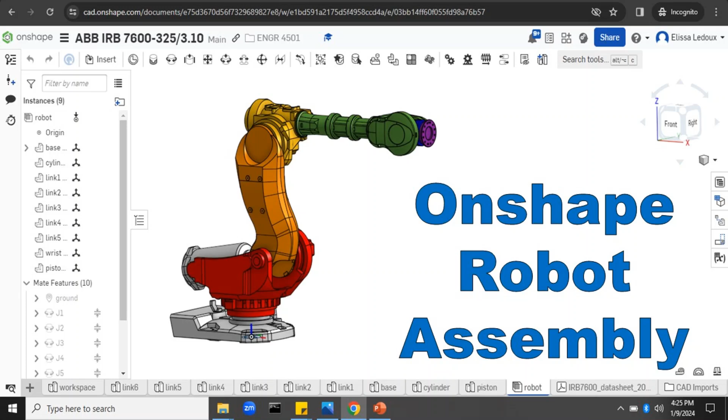This video is going to explain how to load a robot into Onshape and put it together into an assembly file with properly mated joints.

To get started with Onshape, first just go to onshape.com. It brings you to this page, and if you are a student, you can create a student account up here. Click that and create your student account using your school email address. If you need to renew your student plan, you can renew it here if you already have one. Now I already have an account, so I'm going to log in.

Basically, what you want to do is create your first document. You go up here on the top left to create, then document. You can call the document whatever you want - I'll call it a robot. You would want to name it after whatever the robot is that you're going to load in, but for now it's always possible to rename. That's one of the benefits of Onshape - you can rename your files and it still knows what they are, even if you've used them in other documents. So we'll just call that robot for now and create.

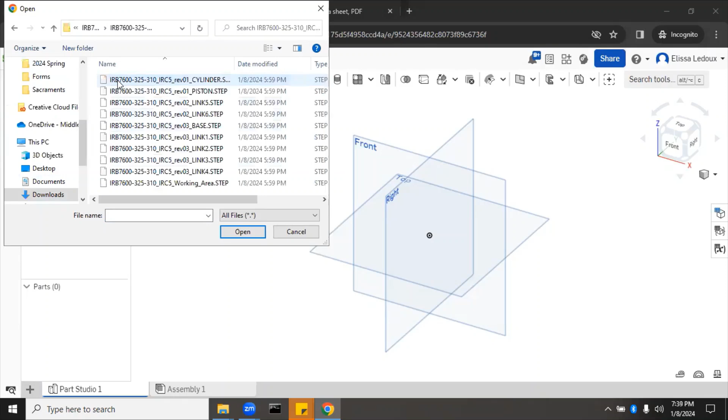So it brings us into here. To import CAD files, you click this plus button and select import. Then navigate to wherever on your desktop or computer you have stored that - normally it would be in downloads. If it's a zip folder, make sure that you unzip the files, go into those unzipped files, and you can just highlight all of them and click open.

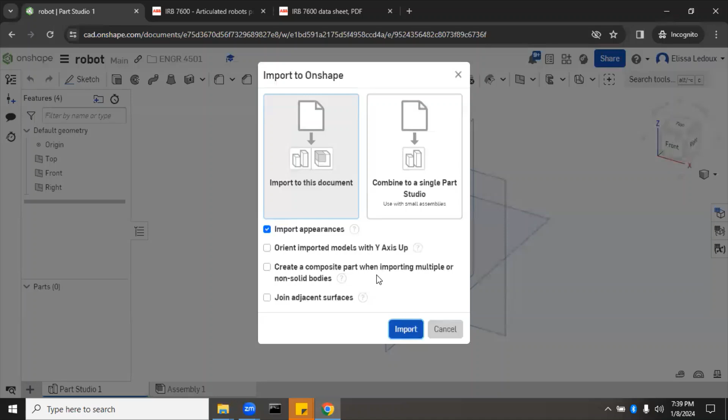Import to this document, import appearances - that's fine. Imported models with y-axis up would be if you are importing a SolidWorks file in particular, and creating a composite part when importing multiple or non-solid bodies would be if you just have surfaces. But in this case for the robot, we don't want to create a composite part of the multiple robot parts, because that would lock it all as one piece and then you wouldn't be able to move it. So we'll just go with import appearances, click import, and it will take a few minutes for everything to upload.

You'll know when everything's uploaded because it will say the name of the part and then 'was translated successfully.' We'll X out of that. And this is the IRB 7600 robot - so this is what the robot looks like.

The particular model that I brought in was the 325 kilogram, 3.1 meter reach, and I used the step file. You can also use a parasolid. This was gone into more detail in the previous video, but just to give an overview, it's that.

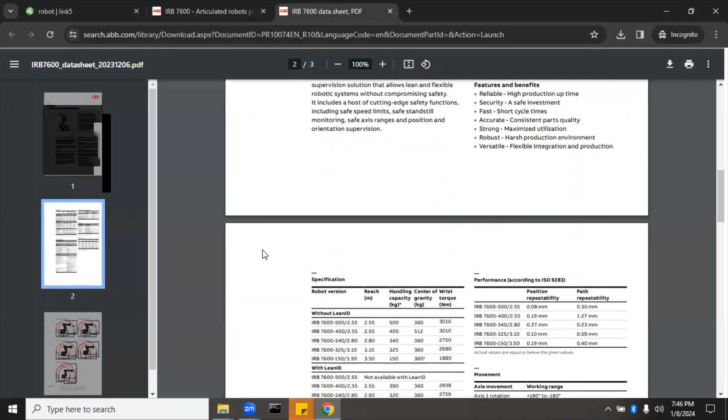You go down to more information, and if you click on the data sheet here, that brings up this file, which tells a little bit more about the robot - the axis ranges, the different models that there could be, max speeds, and other stuff like that. So it's the data sheet for all the 7600 family, and ours is this one here.

So we can rename our robot - that's 7600, 325, 3.10. You can see all the parts showed up here on the bottom.

We'll click on these different ones - working area, and they'll all go here. Then there's a new folder called CAD imports, which just has all the individual actual files, not the translated version. To get out of that, just click the all tabs button again, which brings you back here. So Part Studio 1 has nothing in it - we don't really need that, so we can delete it.

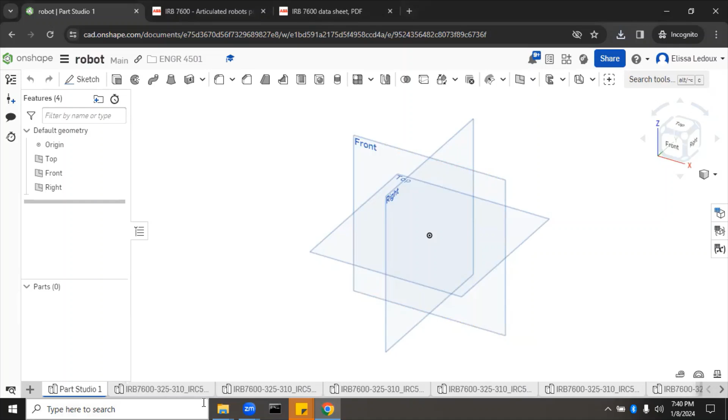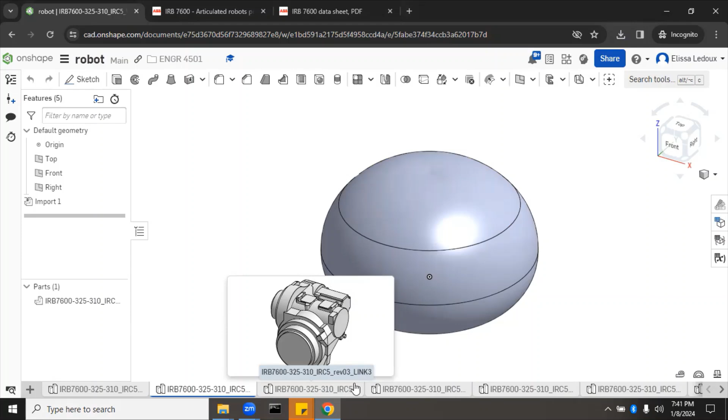This takes us to our next part. One of the things we'd want to do here is go through and actually rename these files, because right now they all look the same. You can see that the whole name doesn't fit, so we'll want to rename that so everything's called what it actually is.

So this is the workspace - this is just an illustration of what the robot can touch. We'll rename that and call it workspace. It's also just sort of like a bubble - say bubble.

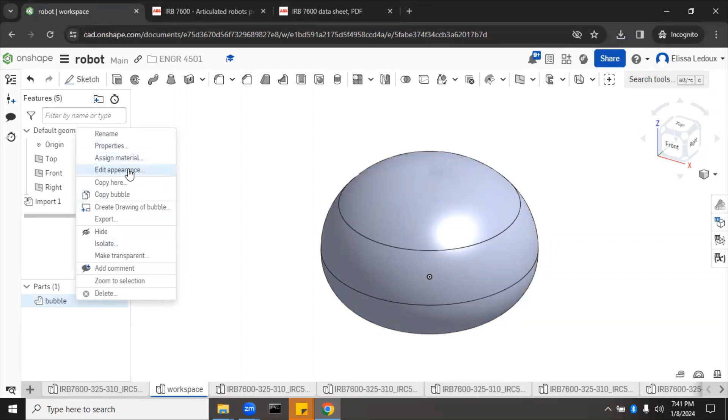Now for this one in particular, we might want to change the color of it. So we'll right click, edit appearance, and we can make it transparent, change part transparency, so this way we can actually see what's inside of it. Let's just put that to 50%.

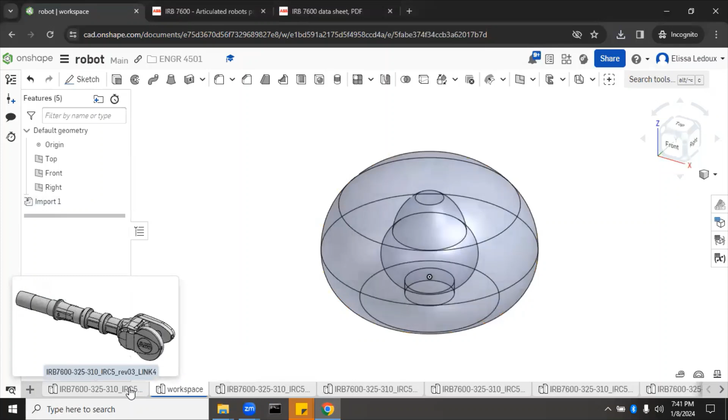Okay, moving on - this one's link 4, so I'll go through and rename all of these. Right click, rename link 4. You'll see in here there are actually 5 different things, and we just want this to be one link. If we go through and click, that is the actual link. This is some little part on the top, this is the ABB logo from the other side, this is another little part, and this is another ABB logo. So this one was the main one, and that's the one we'll rename as link 4.

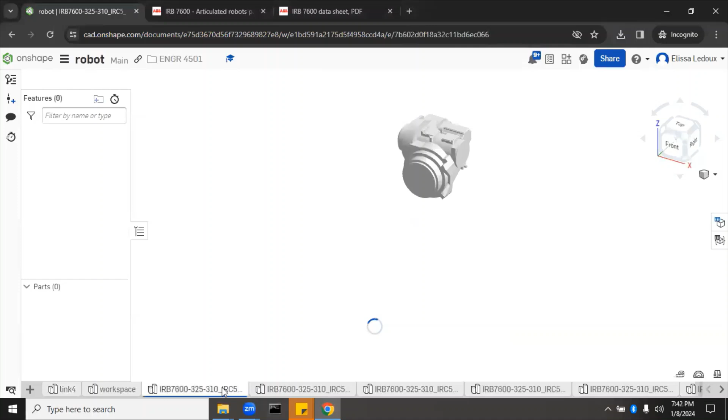Okay, now link 3 - right click, rename link 3, and then on the parts again, right click, rename link 3. You want to just go through and do that for all of the parts.

Okay, so we renamed all of those. Now the piston and the cylinder are parts that don't have an actual link number, because not all robots even have them. But this particular robot has a piston and a cylinder just because it's so heavy that it sort of needs that to help its joint, to help out the motor at joint 2.

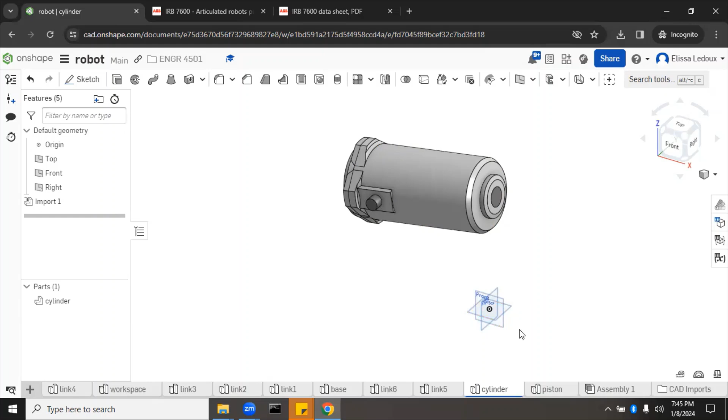Now that we have all of these parts, you'll notice in some of them that there's this sort of little front, top, and right planes, and the part is not necessarily at the origin. That's okay, because what's happening with this part is it shows up the distance away from the origin that it will be in the assembly.

So if we go through and click here, link 5 is up at the top, and just to give you an idea, we'll click on that and rename it like that. Okay, so now we need to take all of these parts and put them into an assembly.

So click on the assembly tab. We'll rename it and just say robot. Then we go to insert, part studios. All of the parts show up here.

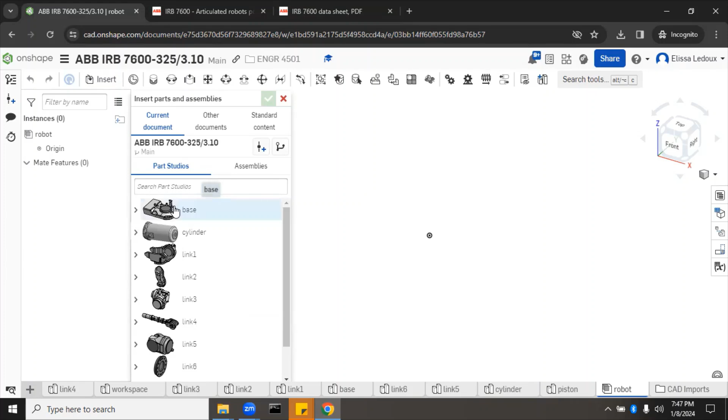So we can just click on every part, click on each part without moving your mouse away from this little window, and you'll see that the parts are all showing up in the right place.

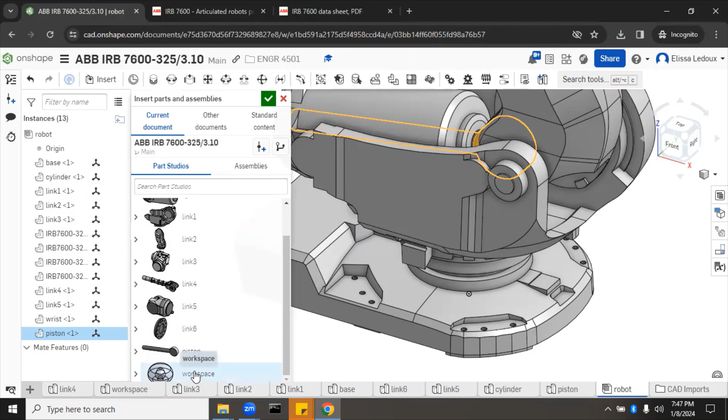So we did that, and then piston. Now we don't really need the workspace, so I'm not going to—well, I guess I can bring that in and show you how that works. Then we'll click the check mark.

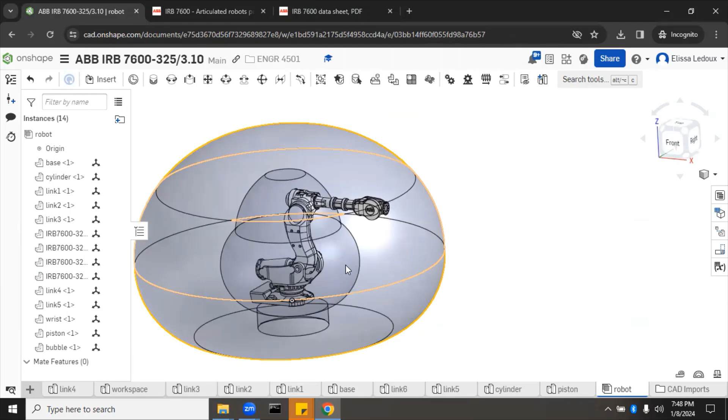Okay, so all of the parts are in here. I'm going to zoom out. All right, so this bubble, we don't necessarily need it, but we do want it to stay in that location. This bubble explains all the places that the robot can reach. The robot can basically reach anywhere between the outer bubble and the inner bubbles. It's programmed not to go into the inner bubble so that it won't collide with itself.

So we'll take this bubble and right click, fix, which means it can't move, and then right click, hide, and it disappears. Okay, so it's still there, we just can't see it.

So the robot looks right, but what can happen if we actually try to move it—let's say we just click on it and try to move it—it falls apart.

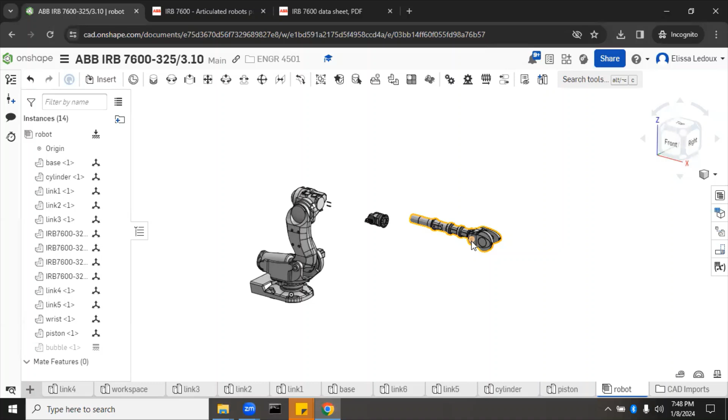So we'll undo that. We need to mate all of the parts together with revolute mates at each joint. This will allow the robot to move like it normally would. So step one is to mate all of the joints together, and step two will be to set joint limits so that the robot behaves the same way that the datasheet says it should behave.

So we'll go through and do the mates. We want to mate from the bottom up to the top. That will prevent the other parts from moving around while we're working on this one.

So if we first want to mate the base, we see the base here. Now we also see over here all of the links came in as expected, and the extra junk that was in there with link 4, we don't really need that here because it doesn't help tell us how far the robot can reach. The main thing with loading the robot in is that we want to see if it can touch all of the places in its cell that we need it to touch. So we'll just get rid of those.

Now, the cylinder and the piston—those are also not essential. So if you're doing this for the class assignment, you do not need to include the cylinder and the piston, because again, those are really not essential to the distances that the robot can touch. That is really just supporting; it is not a separate actuator.

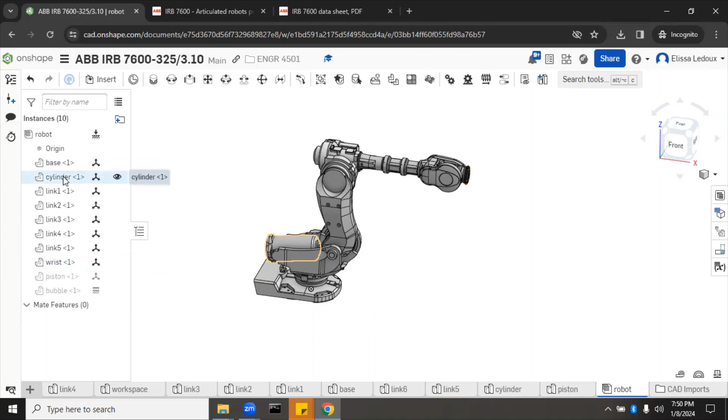So I will show you how to put those in later, but for now, let's just hide that—right click, hide that. Okay, so for your class assignment, this is all you would need as far as what you see. Now we actually do need to mate all of those parts together.

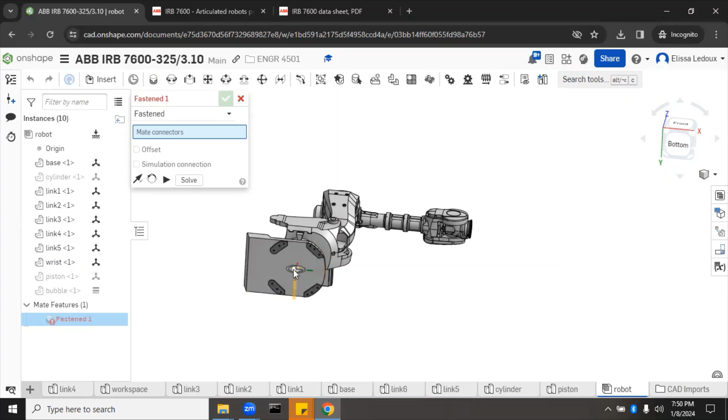So the first thing we want to do is fasten the base to the origin. That one will be a fasten mate. Now if you click fasten mate, then we need to click on the mate connectors. If we click on the bottom here, we can see that it doesn't really go in the center. That's bad, it just clicks on the center of mass. So we need to add a mate connector on the base that will allow us to mate it to the actual origin. So I'll X out of that fasten mate.

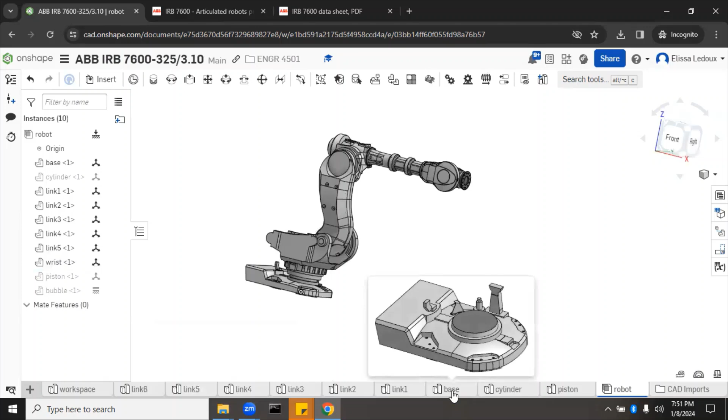And then we'll go to the base, which these are actually kind of not in a great order, so you can just drag these around to put them in a good order. Okay, base, we'll go here. We need to add a mate connector to the base. So adding a mate connector, go to this button, scroll down until you see mate connector, and then click where you want it. We want it on the origin, and the owner entity here is base. So it's on the origin, but it is connected to the part, so it will import into the assembly along with the part. We'll just click check, and we'll go back to our robot, and you can see there it is, it showed up.

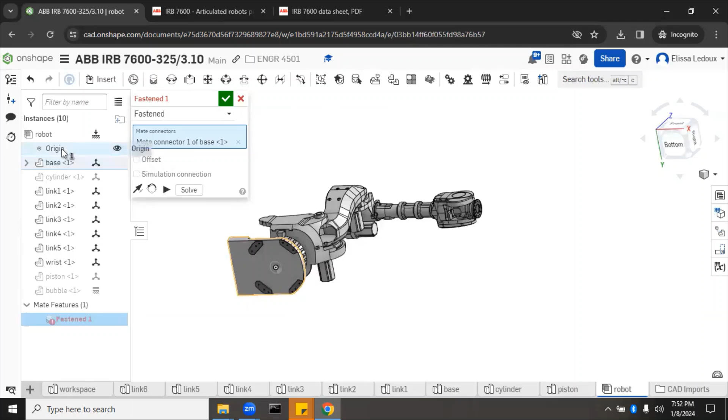So now what we need to do is do the fasten mate. Click, it says mate connector of base 1, so that's good. And we'll just also click the origin. Well, that didn't really work. We can kind of drag this away and then click the origin. And then it pops to the right spot.

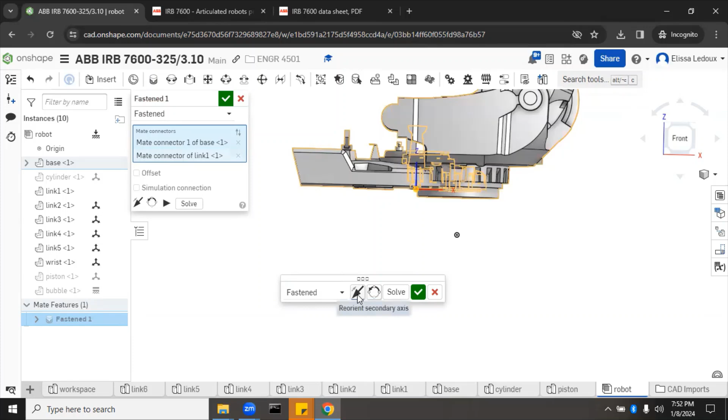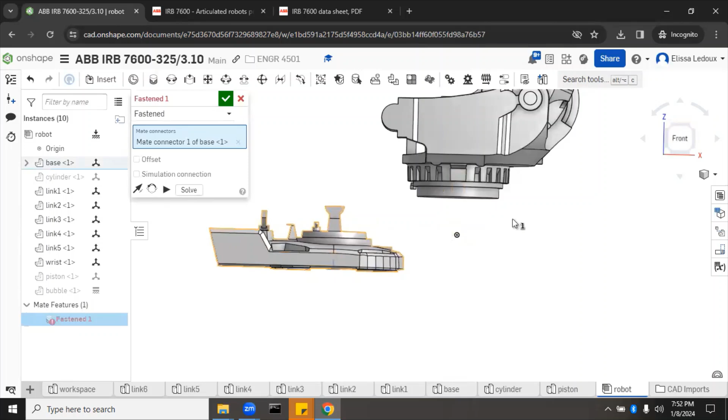Let's just make sure that that looks right. It is upside down. So we flip it, flip primary axis. Actually, that doesn't look right either, let's just undo that, we click X. Okay, it goes away. So fasten mate again. We will get the mate connector of base 1, move that out the way. Click the origin. Okay, that looks much better.

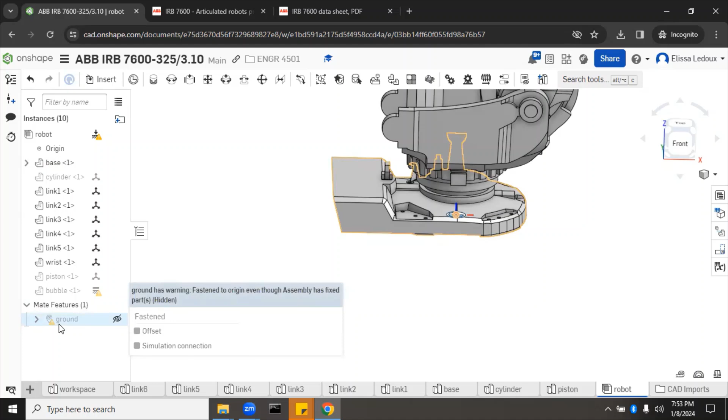And we will call this ground. So now we have the ground. Okay, it says fasten to origin even though assembly has fixed parts hidden. That's fine, I think, that's just the bubble. We can even delete that bubble, we don't really need it. Okay, so that made the error go away.

All right, so next we need to do each of the joints, starting with joint 1 and going to joint 6. So the joints will be a revolute mate. Here's the revolute mate button. We'll click on the revolute mate and we need to find the mate connectors. So we'll drag link 1 out the way. We need to mate base to link 1. Just click in the center and it should automatically find the mate connectors. Okay, looks good. Rename it as J1. Check.

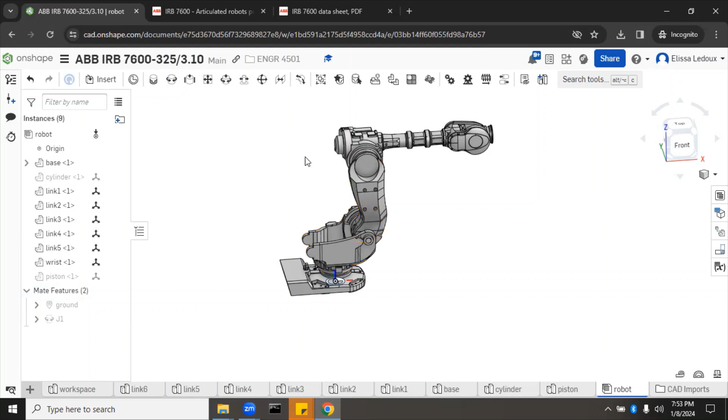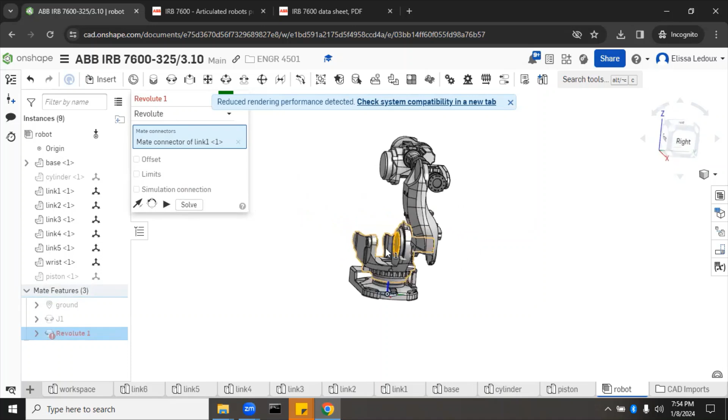Now joint 2 should be around this joint. So, okay, looking at that, joint 2 goes through here. So we'll take a revolute mate and then we will drag that out the way. Click link 1 and then click the side of link 2 that matches to it. Okay, that popped into place correctly. So we'll call that J2. Click the check mark. So when you click that check mark down there in that box, it automatically opens up a new one. So we need joint 3 now, which will be this one up here at the top.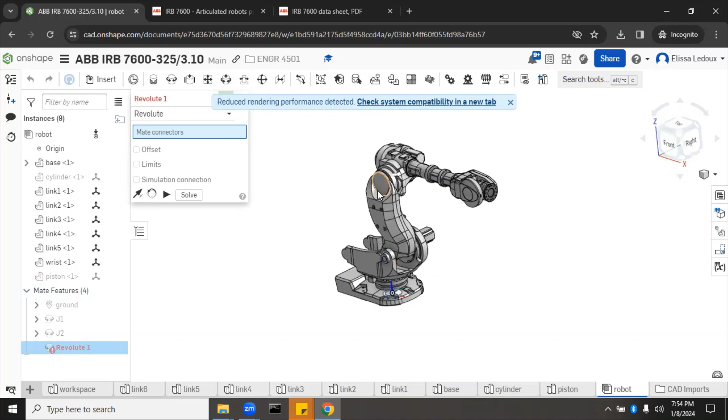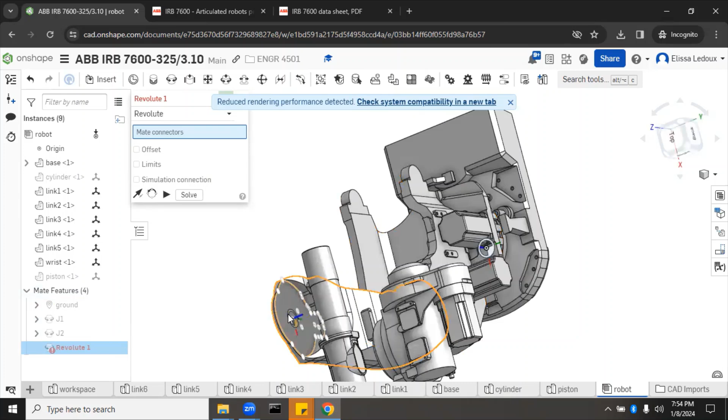So let's move that out the way. Okay, so we need here and center of the circle here. Call that J3.

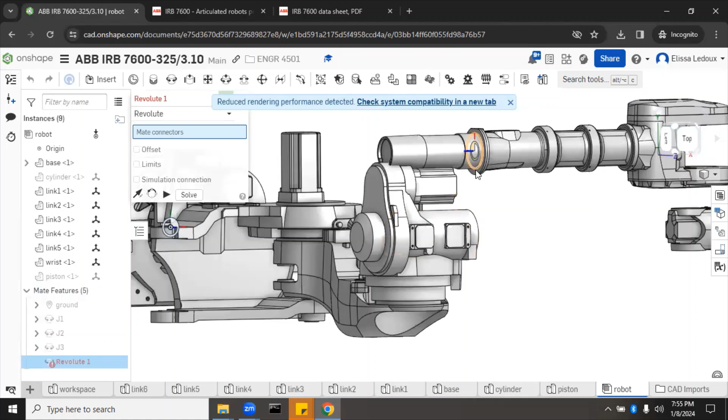And then the next one is link 4. So look, when I highlight link 4, you can see that it actually goes all the way to the back. But this part here is where there's going to be a separation. So I'm going to go over to the top. You can see when I move that, it was actually all the way in the back. So when we do our revolute mate, we'll revolute mate this ring because this is what was actually connected to link 3 here. Call that J4.

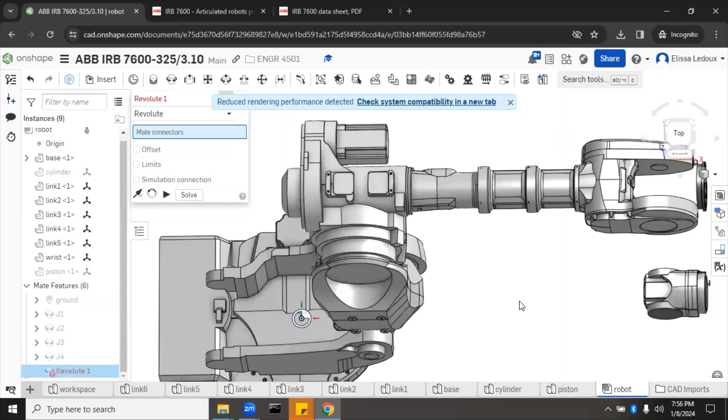And now we need J5. Okay, move that out of the way. Joint 5 is going to go through between those two. So we will put the revolute mate. Like that. Like that. Call this J5.

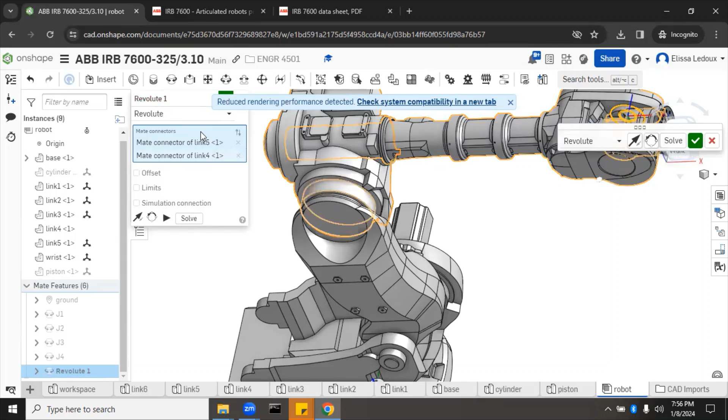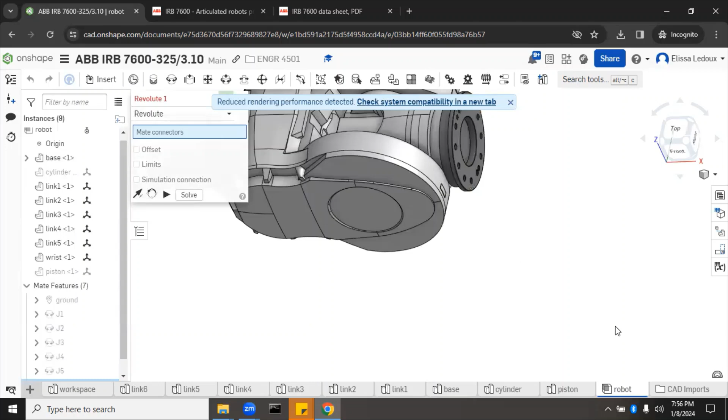And then finally we have joint 6, which is the wrist. So we'll pull the wrist off. Sometimes it takes a little to actually drag it around. Okay, we drag that off, but that wasn't the spot we wanted, so we'll X that. Click this. Click that. And now we have J6.

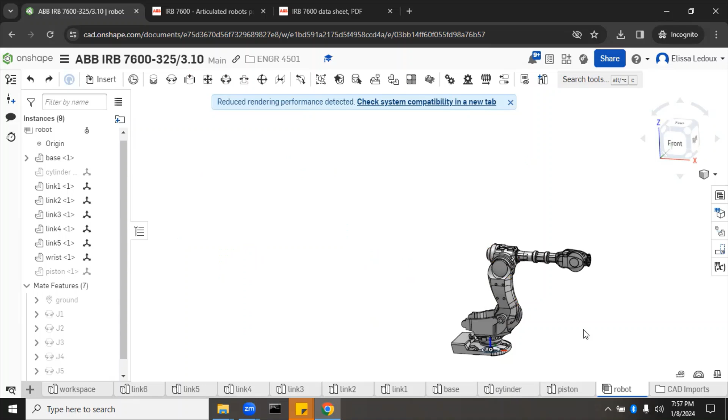Okay, so we have all 6 joints. So now we can kind of move it around, see, okay, that spins fine. This moves back and forth. That spins. Let's just undo, get the robot back to where it was. Sometimes you get the robot into like some crazy weird position.

In order to always go back to where you were before, we need to make a home position. So home position is when all joint angles are 0. To make that, go over to named positions. Click add named position, click in here where it says name position 1 and type home. And then enter, click this done here in the yellow box.

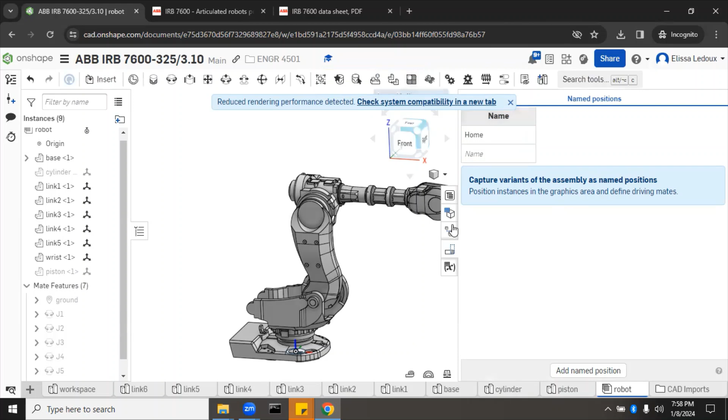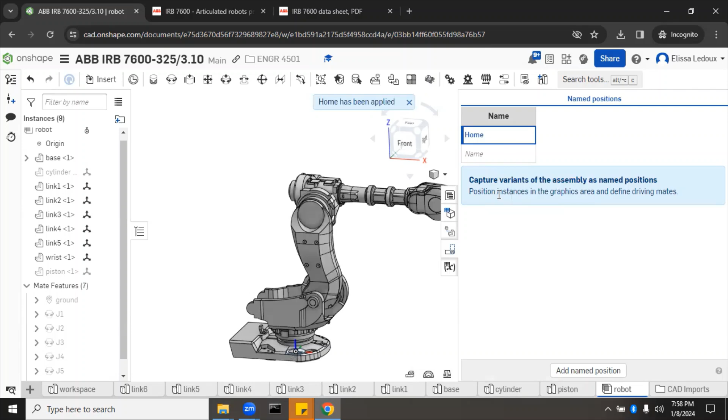Okay, so now if we say we get the robot into some extremely bizarre position, how do we get out of this? Well, we go back to named positions, click home, right click, apply named position. Now it goes back to normal, and we can click the named positions again, and that just sort of wraps up that sidebar.

So now the robot is moving correctly, but we need to make sure that all of the joints are actually within limits. Even though in our model we could swing the robot all the way around, the robot can't do that in real life. It would collide with itself.

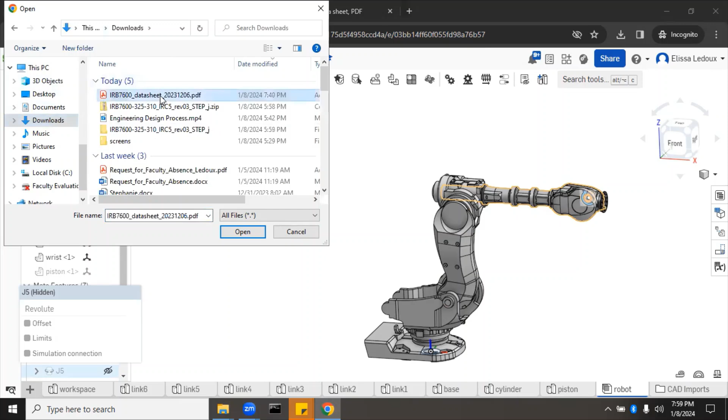So we need to put in the appropriate limits as seen in the datasheet. Here is the datasheet that we had downloaded. We can, if we want, actually import that datasheet into our file, so we'll go to downloads, select the datasheet, and open that.

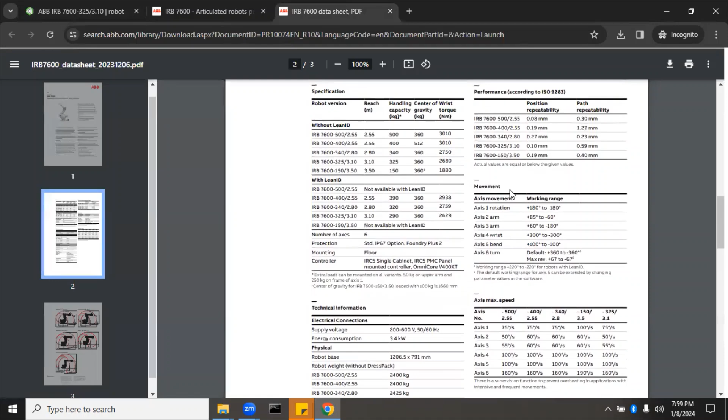That will bring in the datasheet so we always have it to look at if we need. Looking at the datasheet, we need to find the movement section. I'll zoom in so we can see it better. Working range, axis 1, plus and minus 180. So joint 1 has limits of plus and minus 180.

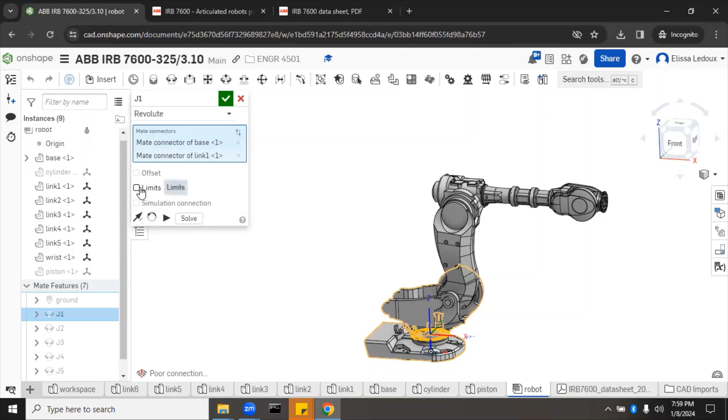So we right click, edit, and click limits. Minimum minus 180, these are all in degrees, maximum 180. We can click this play button to see - okay, so that spins around, great.

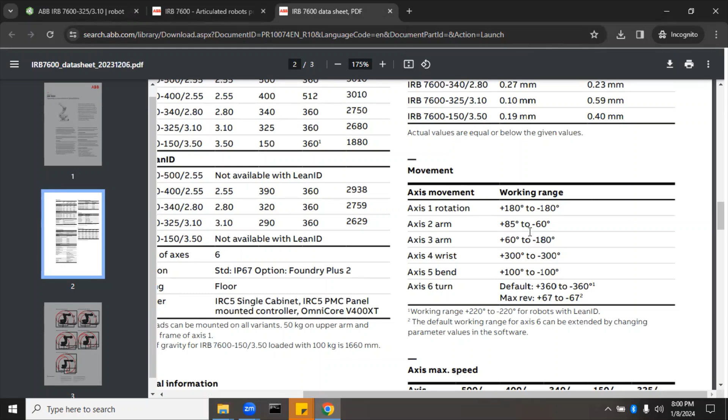Now the second joint, plus 85 to minus 60. So the robot can go - if we look at which way is plus and which way is minus, that's critical. The robot can go forward, moving like that, or backward, moving like that. You can actually click on it and rotate it - that's easier sometimes. So it can go back there, it can go forward there.

So let's see in the datasheet, plus 85 to minus 60, which direction should each of those be? We go to J2, right click, edit, limits, and we'll say negative 60, then positive 85, and see if that moves like we think it will. Just press the play button.

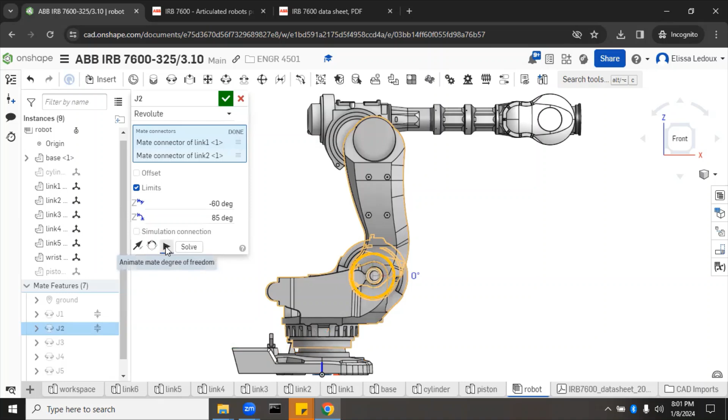Well, that was really not what we wanted to do. We can switch these, reorder items, and play it again. Okay, that didn't help. We'll just click the check mark and see how it can move.

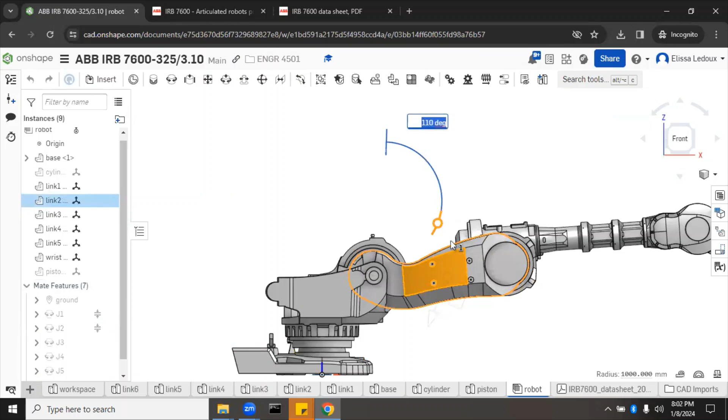Try and move this - okay, that's as far as it goes down that way, and then we'll move it back here. So that seems like it went backwards 60. If this is 0, that looks about 60 degrees. This looks about 85 degrees. So this is probably correct.

Okay, so now joint 3. Positive 60 to negative 180. So joint 3 it looks like could probably go down 60 and then back 180. Okay, so that must be positive here, must be clockwise - the axis must point into the page.

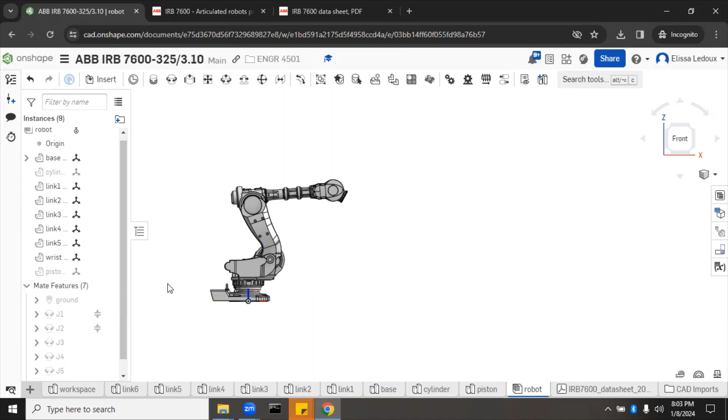So we'll right click, edit, limits, and we'll just say 60. And oh wait, no - so that would be negative 180, and then 60. And check.

Still doesn't tell us. We'll right click and fix that - so now that one's fixed, that one can't move. Now we can rotate this. That looks like we probably put the 60 and the 180 in the wrong place, because that won't go anymore.

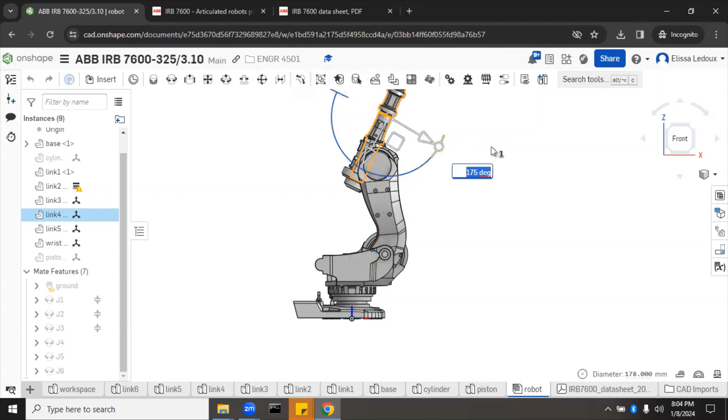So we will edit: minus 60 and then plus 180. Okay, let's just hope that's right. Okay, there we go. Now link 2, we had it fixed, so we'll just unfix that, and then back to home - right click, apply named position. Okay, it's fixed again. And now J4.

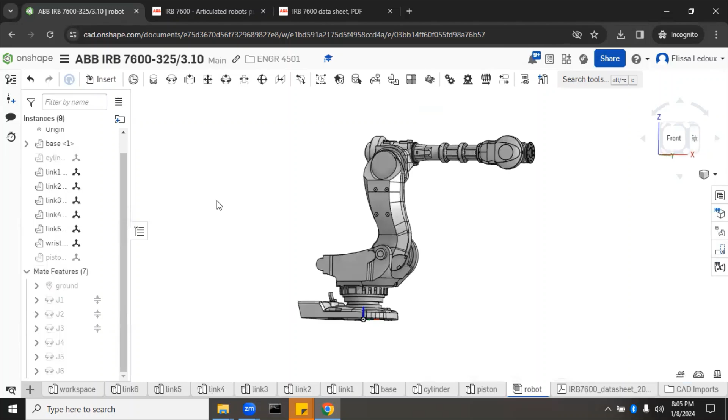Look at J4: okay, that's plus and minus 300. So that one doesn't matter which one's really the positive or the negative. So edit, limits, negative 300, positive 300.

All right, so now joint 5. Okay, plus and minus 100. So we'll go back here, right click, edit, limits, minus 100 and 100. Okay, looks about right.

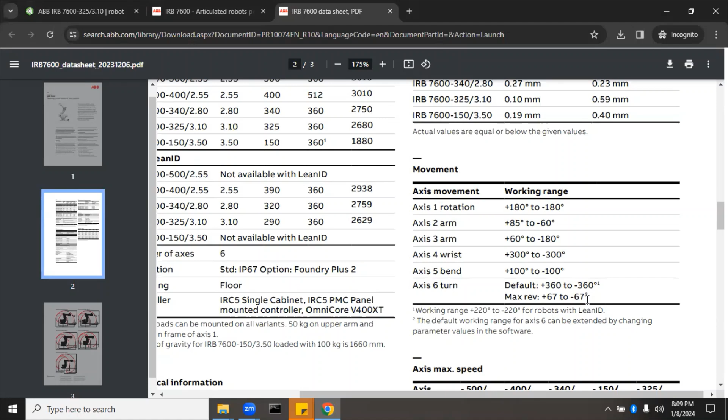And then finally joint 6: plus and minus 360, maximum revolutions plus 67 and negative 67. So that's pretty huge, but we'll just put in the plus minus 360. So right click, edit, limits, minus 360 and 360.

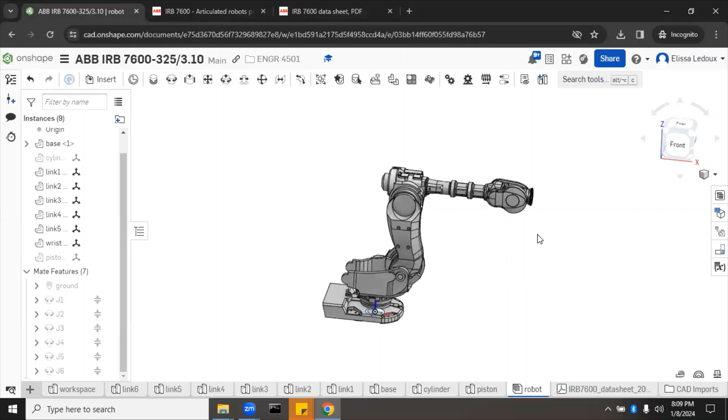All right, so now we have all of the limits set. This robot is ready to import into a document. The next video will explain how to import that robot into an assembly and check if it can reach all of the right positions.

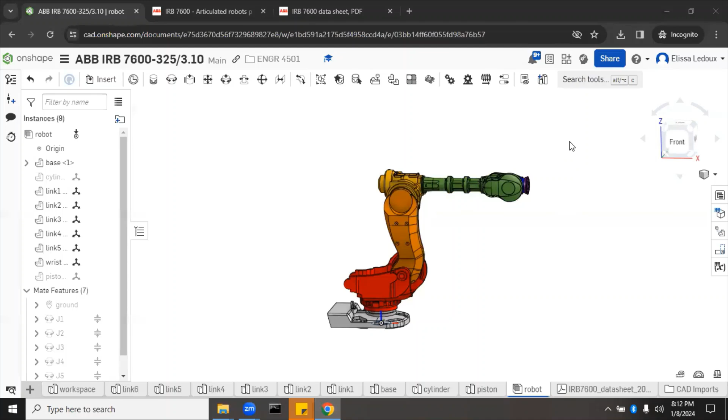So here I have color coded all of the pieces just to make it easier for you to see. The base is gray, link 1 is red, link 2 is orange, link 3 is yellow, link 4 is green, link 5 is blue, that's a little hard to see, so I'll go over the top, and link 6 is purple.

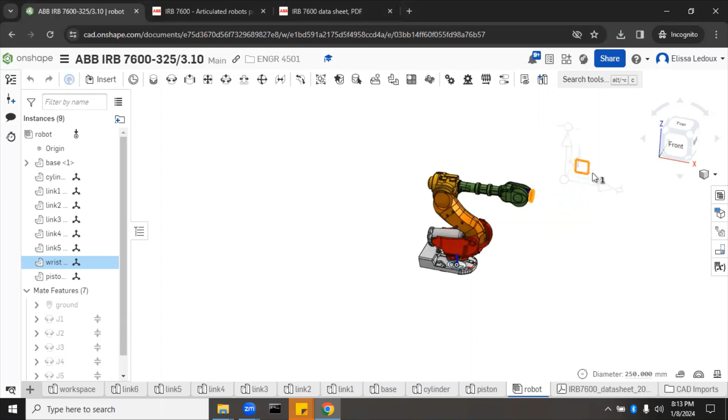One thing I didn't tell you how to do earlier was how to put in that cylinder. So we have the cylinder, we'll show this now, right click and show, and the piston, right click and show. If we want to mate those in, right now if we move the robot, one easy way is to click on the wrist, then you can make it move in certain directions. You want the end of the robot to be in a certain place. So you can see the robot is moving around, but the piston and its cylinder are not.

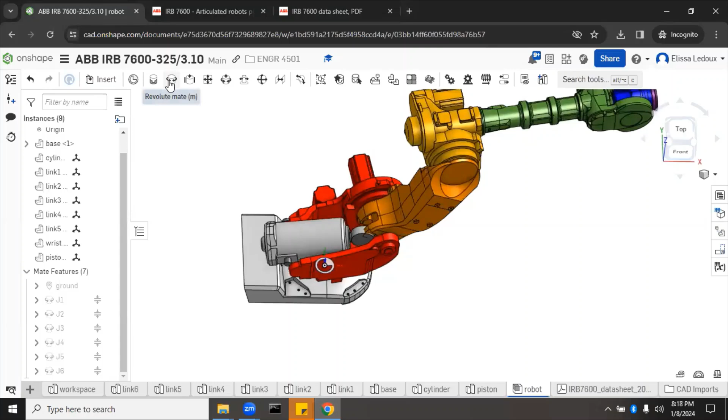Okay, so we need to fix that. Let's do the mates that we need. So let's make a revolute mate between the piston and zoom in on this link 2 there. And we'll call that JP2.

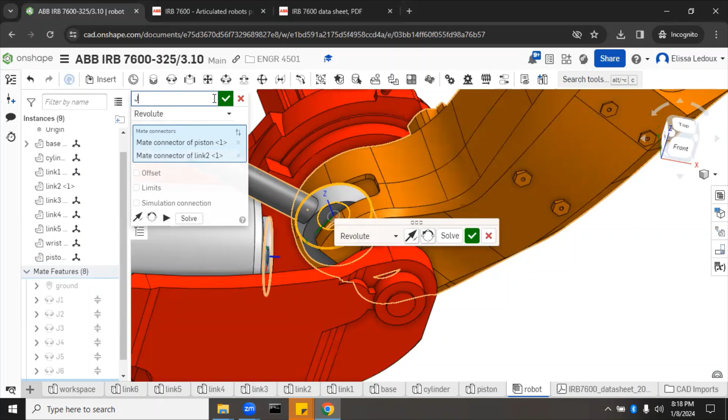Because it's the piston. Okay, so let's look at that from the top and just make sure that's lined up properly. I think that looks a little weird.

Oh, okay, so this cylinder should also be mated to link 1. Let's put this back at 0. Double click 0, enter. Okay, and looking from the top, all right, so that seems about, actually it seems a little bit low compared, like it's not quite lined up.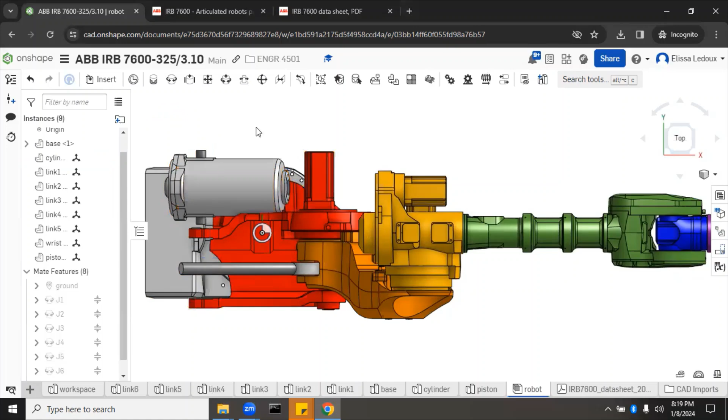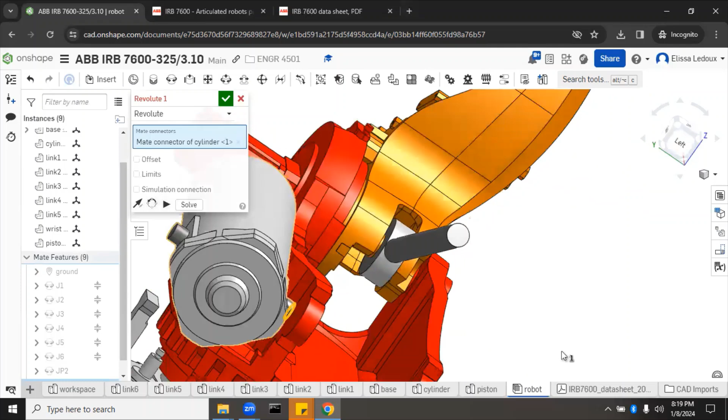Let's see if this works. Click this, let's just move it out of the way a little bit. We can see, okay. So there probably should be a revolute mate connecting those little tabs into the centers of these. So let's say revolute mate between that surface and that surface.

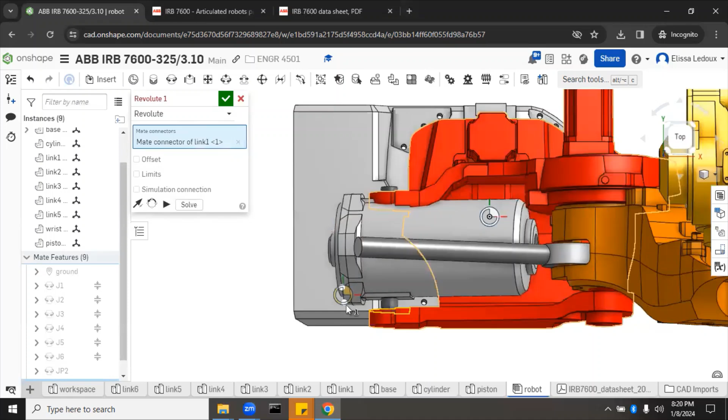See if that works. Look at it from above. Is that properly aligned? It looks like that is too far. So X out the one on the cylinder. We probably want, maybe we want that part of it. Look at that from the top. Is that lined up?

That is probably close enough. Looks like it should. No, there's definitely a gap there, but let's see how big that gap is, and then we'll know how far apart these need to be. So if we click those, show measure details down here in the bottom right corner, and that is Y direction. Okay, negative 13.98.

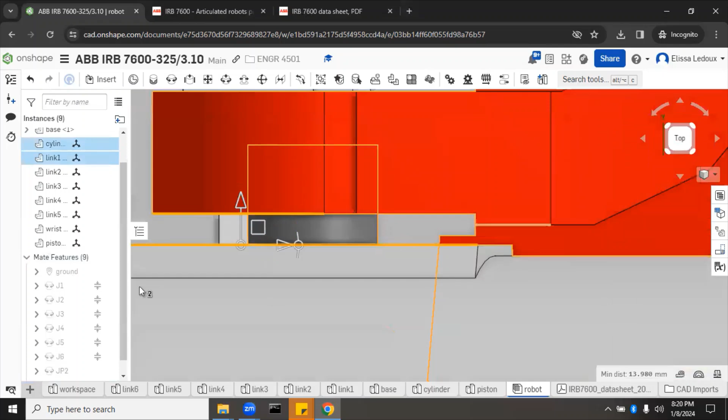So probably we need to move it about 7 millimeters. So we'll go back here, it was just Revolute 1. We'll double click that, offset, and we need a 7 millimeter offset to center that. So the Z offset would be 7 millimeters. Enter. Okay, that shifted the wrong way, so we'll go minus 7 millimeters. Okay, so that looks centered now. And we'll call this cylinder.

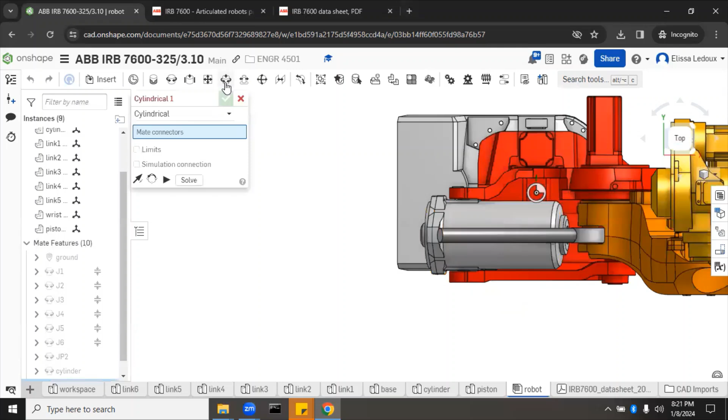Okay, but somehow the piston is not in the cylinder, so we need to do a cylindrical mate. We won't do a slider mate. So that's good, so this one, okay, cylindrical mate here. It can rotate and it can slide. So we'll click that, and then we will just mate. It doesn't really matter anywhere on here, we can mate to that. And let's call this piston and cylinder.

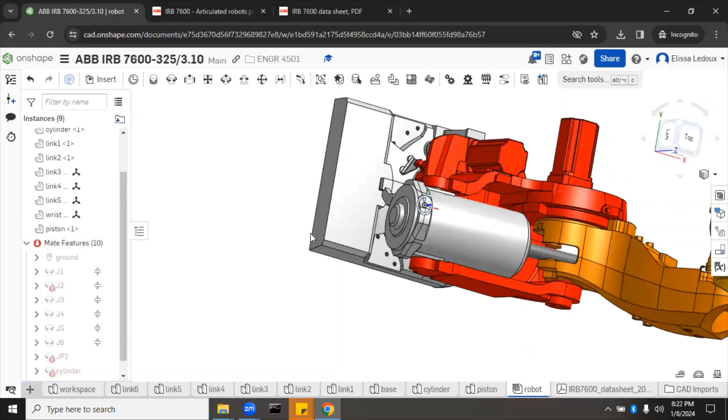So now, let's see if that worked. No, it didn't, but there was this one. We just need to delete that here where the cylinder connected. Delete that, and I bet that'll make everything work. Okay, everything looks fine there.

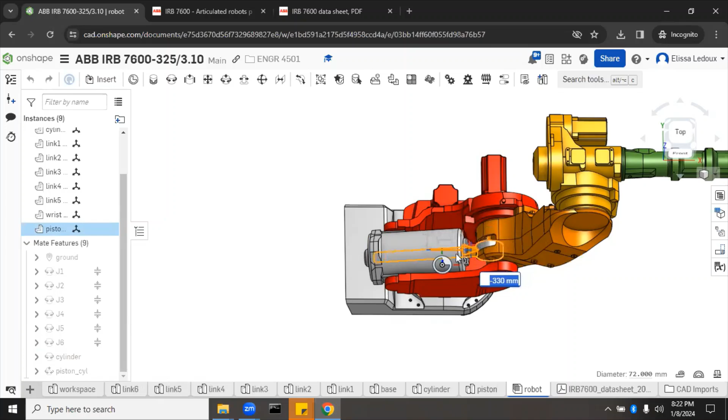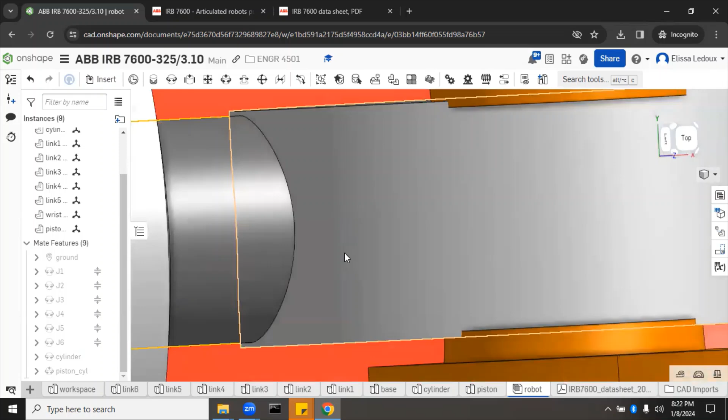But this needs to be slid further back to the top. Okay, and then it needs to be centered there. So we can see that there's actually, it almost looks like there's a little interference there. Probably the parts just are not made exactly, so, because normally this cylinder would realistically need to have a hole through the middle of it, or this piston connection, so that it could actually mate onto here.

We just did the JP2, and instead of making that a revolute, we'll make it a cylindrical so that it can just shift linearly a little bit over. There, everything turned black, now it's nice. Okay, so now we have the robot there. Let's just make sure we can grab the wrist and make sure we can move it around. Okay, good, it moves. Okay, that looks good.

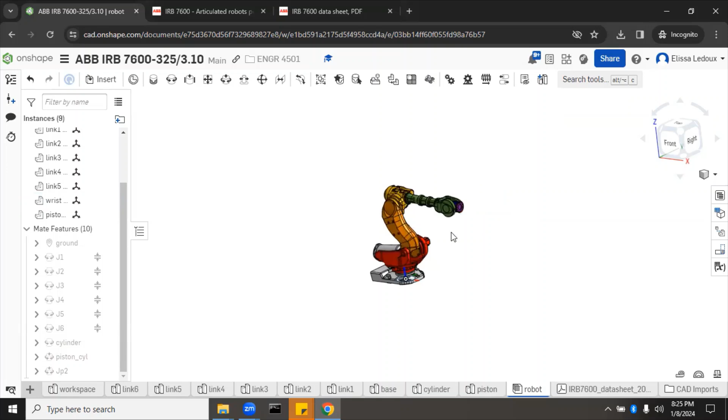So now we can put it into an assembly and make sure that it can touch all the places we want it to touch.

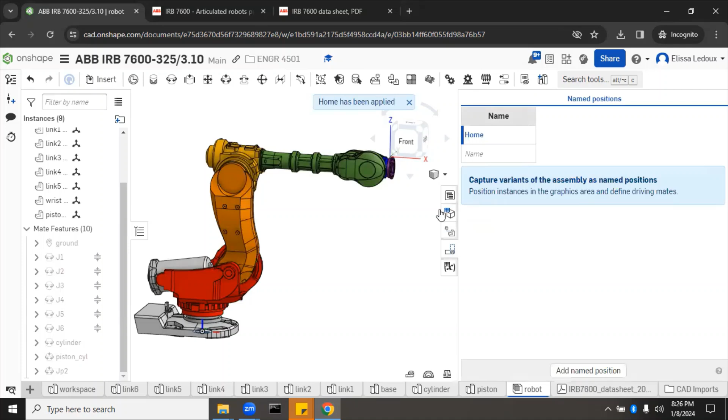Before we do that, we need to save the document. And before we save it, we want to make sure it goes back to its home position. So apply named position. And now, just because we did those cylinders anyway, we'll update named position. Now it's got to save with the cylindrical mates. And then we need to create a document version. To do that, we can click here, create version over here in the top left. Create version, V1, create. So a version has to be created before you can use your robot in another document.

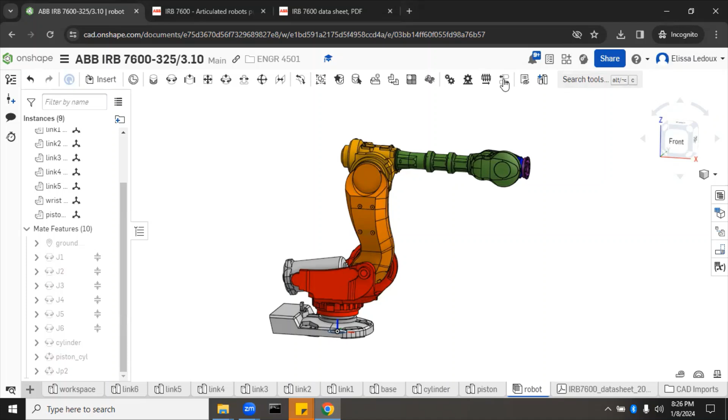So the next video will explain using the robot to reach around the cell to do a reach analysis.